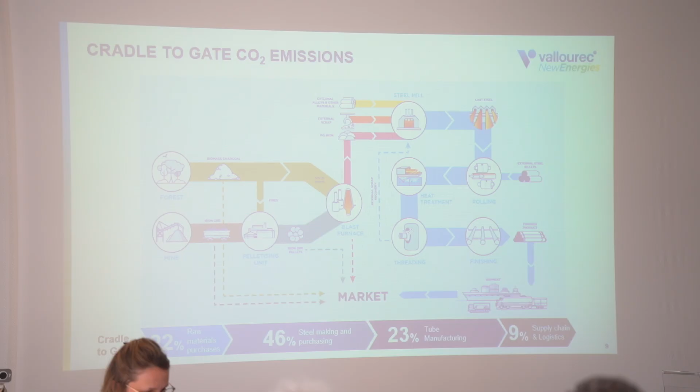So in a nutshell, we are fully integrated. We manufacture our own steel. We have forests in Brazil. We have our own mines. We extract charcoal from the forest, we manufacture the steel in our steel plant, and then we manufacture the pipes. The pipes are then heat treated in heat treatment facilities, and then we manufacture connections to connect the pipes in the well. So that's the summary of the core business of Vallourec, which has been like that for decades.

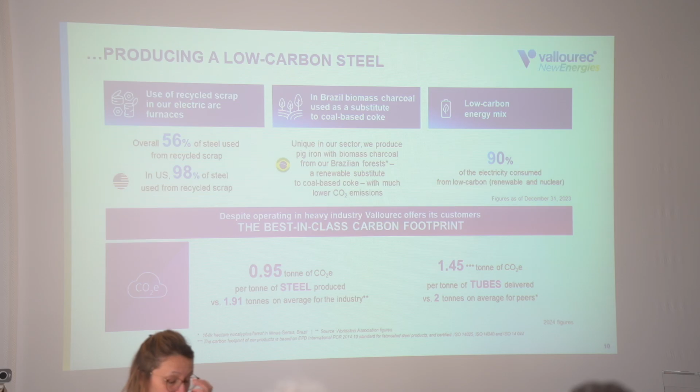Another important factor: we have a very low carbon footprint. For 1 ton of pipes manufactured, we emit around 1.45 tons of CO2, which is very good compared to our peers, which are around 2 tons of CO2. And being fully integrated helps to reach such a level.

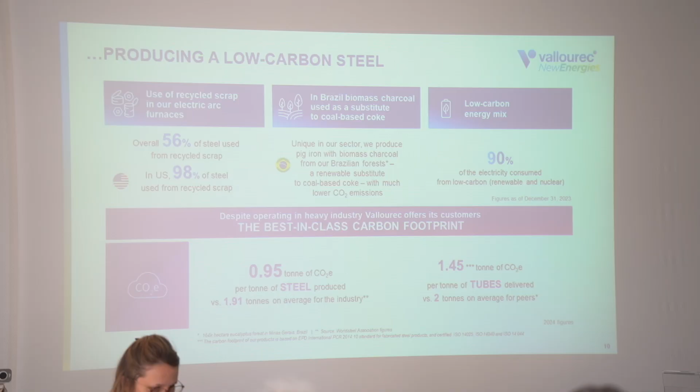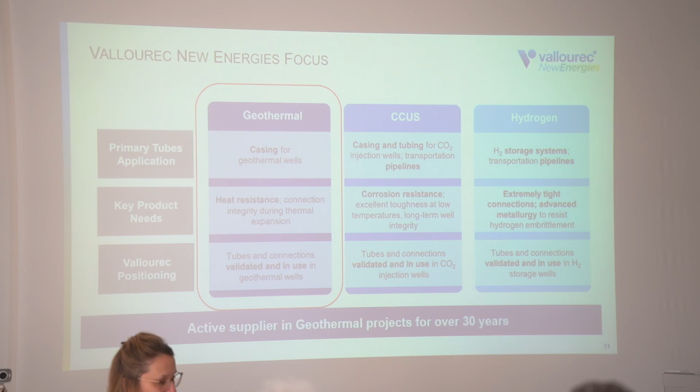So over the last 30 years, Vallourec has delivered casing pipes for geothermal, but we didn't have very dedicated R&D and research around pipe manufacturing. Basically, our customers used OCTG standard solutions for geothermal, with some success, but also some issues that we will cover later. So over the last 5 years, we have set up a new entity within Vallourec dedicated to new energies, with 3 main activities: geothermal, carbon capture, and hydrogen storage. Obviously, today we'll focus on geothermal.

So what are we focusing on? As you know, it was explained this morning, there are different types of geothermal, from shallow to deep. Considering our solutions, we are mostly focused on deep geothermal. So typically, all wells with depths greater than 1,500 meters, starting from Paris Basin types of wells, and of course wells with higher levels of temperature and depth.

So I like to compare the casing string to the backbone of the body. It means having a reliable well, which is a very important target for operators. Wells are designed not to last 5, 8, or 10 years, but rather 30 years or even longer. A key activity is to select the pipes in a way that prevents the different types of failure. Failures are not the same depending on the type of geothermal. For high temperature, you have some types of failure. For district heating, other types of failure.

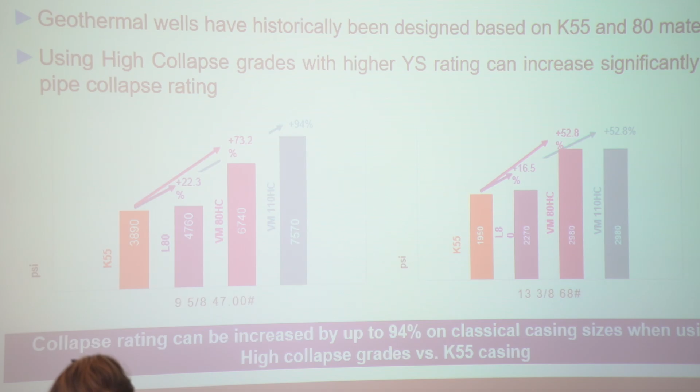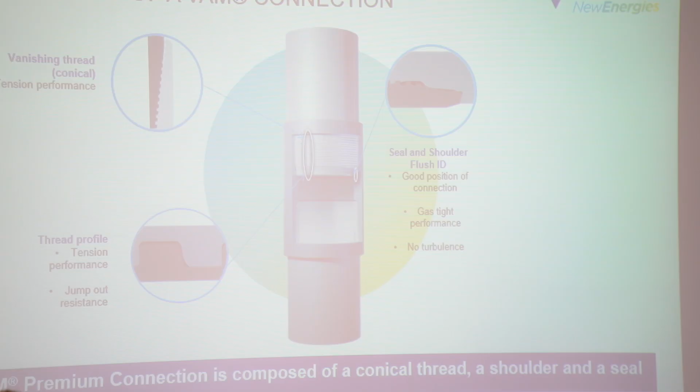Another key part of the casing string are the connections. So this is a summary of the connection technology. The purpose of a connection is to connect two pipes together to ensure mechanical integrity between the two pipes and to ensure the sealability, for liquid, but also for gas. This technology, as I mentioned, has been on the market for decades. It has been upgraded for different challenges in oil and gas.

So we have, again, run some testing according to a specific protocol, which is called TWCCP. It's a thermal well testing protocol. And the connection technology is now validated up to 350 degrees Celsius, which is enough to cover some ongoing projects, but we see more and more projects with higher temperature, targeting sometimes up to 450 and even slightly more. This is not yet achieved; we have an R&D plan to go beyond and to test the connection technology beyond.

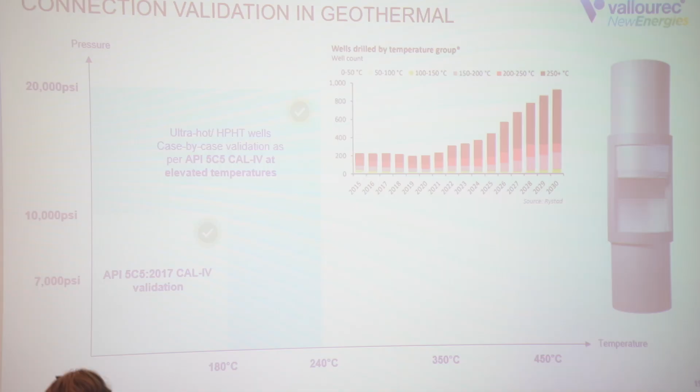I just go one slide back. So as you know, these are some examples of everyday life, like train tracks, bridges and so on.

When in the summer the temperature increases, the metal expands. Metal expansion is a key topic for geothermal. It is already a topic for oil and gas, but when you go beyond 200 and 250 degrees Celsius, it becomes really a key challenge.

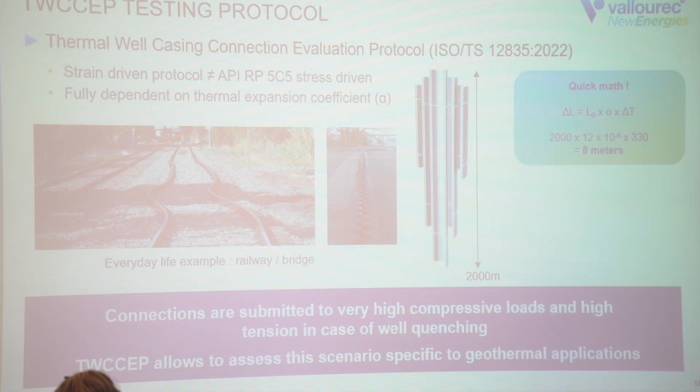Just to take one example, imagine the length of this room is around 12 meters, approximately the length of a casing pipe. So when you increase the temperature of 1 meter of pipe by 100 degrees Celsius, its length increases by 1 millimeter. So if you increase by 300 degrees Celsius, this 1 meter piece of pipe will increase by 3 millimeters. So let's now imagine the 12 meter pipe. Its length will increase by around 48 or 50 millimeters.

So this is huge. So it means a 2,000 meter casing, so 2 kilometer casing, will increase in length by around 8 meters. So this is a key factor. I like to take figures. It's easy to evaluate. So it means that the casing string at some point has to absorb this length. There are two ways. Either the casing is free, but in real life it's not the case because the casing is in most cases cemented. So it means the temperature increase will induce some high level of compression, and this can lead to failure.

So that's why we need to have solutions to address this point, and that's why connection technology suitable for oil and gas is not necessarily straightforwardly transferable to geothermal. Okay, so hence all those tests done on connections. This is done in one of our testing facilities, the one I mentioned earlier, which is in the north of France. Some of you in the room visited the testing facility a few months ago.

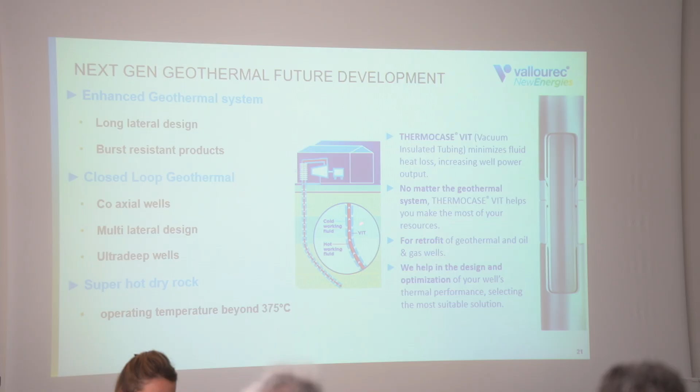Okay. Last but not least, we are also working to support the new technologies for geothermal, including advanced geothermal systems. So this is an example of a well. This is a coaxial well where the cold fluid circulates down in the annulus and gets heated up as it goes down, and then it goes back up in the tubing. Obviously, if you do that, you have cold fluid which is very close to very hot fluid. So at some point, you have an issue.

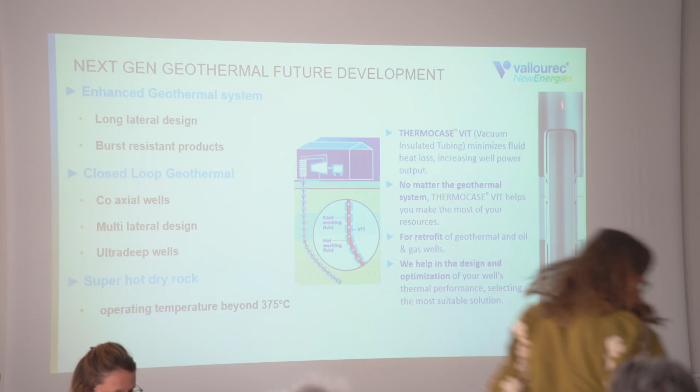So for that purpose, we have not developed but adapted a technology that was already existing for oil and gas, which is VIT, vacuum insulated tubing. It's a solution with a pipe-in-pipe technology. And in between, you have some vacuum, which prevents the heat of the hot fluid going up in the middle from exiting outside. So it works similar to a bottle for your coffee in the morning. And this is manufactured in one of our mills in the US.

This technology is now tested in the lab, and we have also increased the temperature rating of this technology up to 350 degrees Celsius. And we have 3 or 4 wells where this technology has been installed, mostly in the US. And we will run some tests closely with our customers to understand and to validate the models that we have.

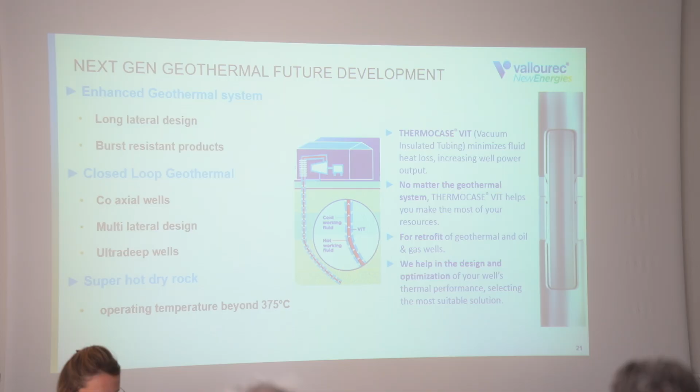Okay, so that was my last slide. Maybe one important point: in all those projects and all those technologies, we work very closely with customers, because the best way to understand what's happening and what the challenges are is to work with customers, whether it is on corrosion, on mechanical constraints, but also with these closed loop systems and this vacuum insulated technology.